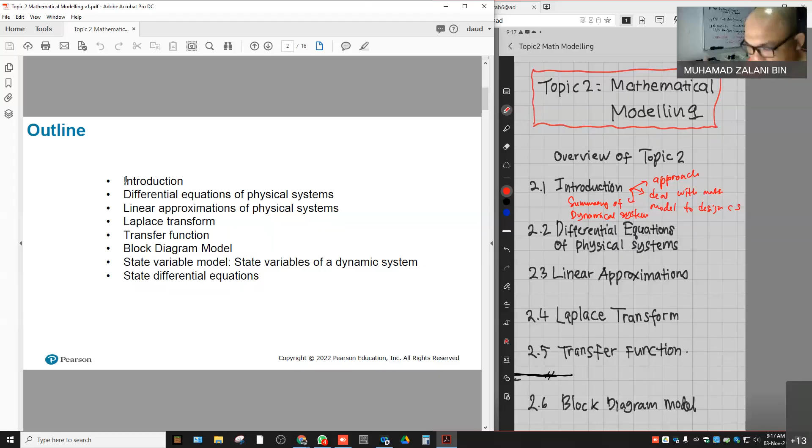Okay, after the 2.1 introduction, I will start with 2.2, which is differential equations of physical systems. So here we describe variables. You will be introduced to variables like the through variable and also the across variable.

What is the difference between through variable and across variable when we design the system using differential equations? In differential equations we deal with variables, derivatives, integration and so on, and for a particular variable we will see the difference between through variable and across variable. We will go into more detail about those.

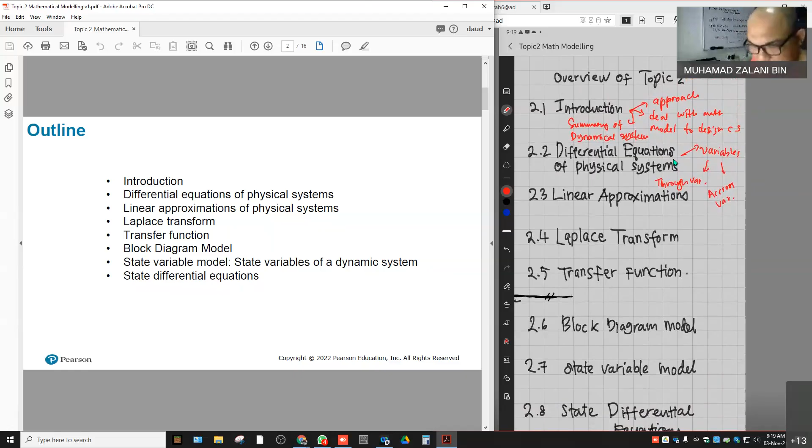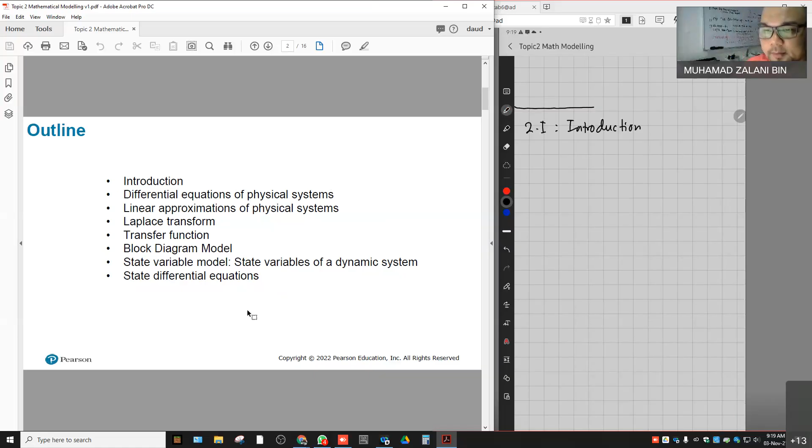Okay, so I hope that we can finish 2.1 and 2.2 in this 1 hour session. I don't know if I can cover it all, but I will try. Okay, so the beginning of topic 2, I'll start with 2.1, which is introduction. You see the slides, right?

Okay, so basically control system design and analysis is part of engineering design. If we have the group of engineering design like this, control system design and analysis is part of it. We can say that it is one of the branches of engineering design.

So what do control system engineers do? If you are an engineer dealing with control systems, what is your job scope? What do you actually do? Basically, what they do is design the control system, design a system by means of, yes, mathematical modeling.

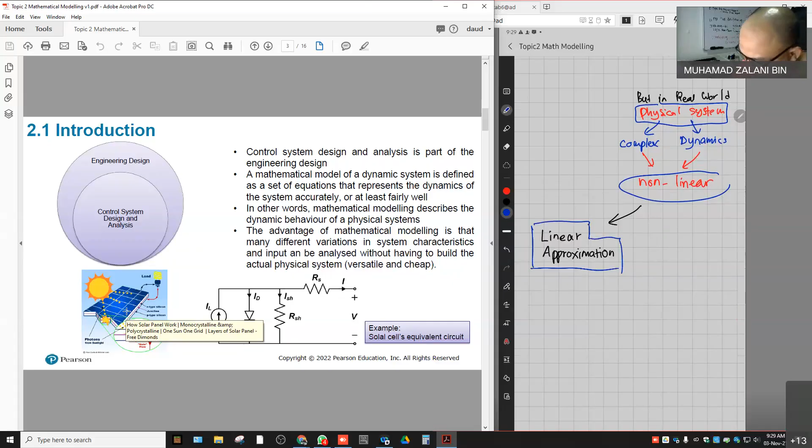Basically what we do is use mathematical modeling to transfer or convert the non-linearity of a system into something linear. This method is called linear approximation. You've already learned linear approximation. So in this case, we convert the non-linearity of a physical system, we transfer it, we do the linear approximation.

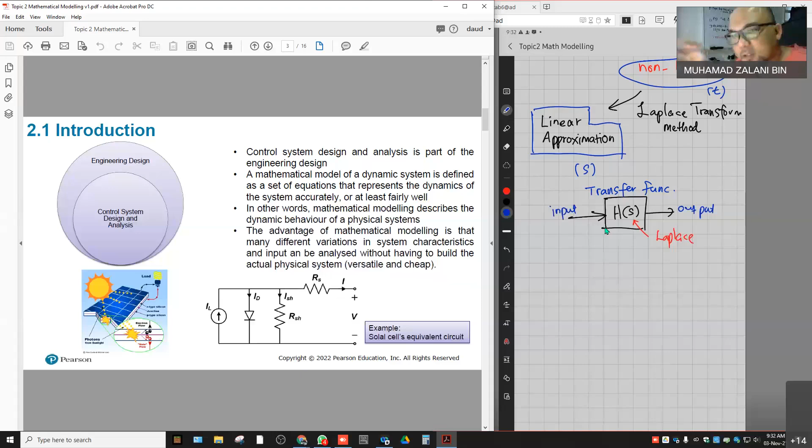So we represent that, sebab kalau tengok transfer function tu ada S kan, mean that this is Laplace. So we represent it in the form of transfer function that has the input signal and output signal. Dah nampak sikit dalam introduction, kita banyak menggunakan block diagram to represent the control system, something like this.

Ada block controller, ada summing point, ada plant, and then ada output. Ini plant HS katalah, ini controller GS, dia punya transfer function untuk controller GS, model je lah. Kita dah buat model dan dah transfer kepada dalam bentuk transfer function gunakan Laplace transform. So kita ada blok-blok macam ni, so kita dapat output.

Then kita juga menggunakan sensor. Sensor juga kita boleh model untuk design a closed loop control system. As you can see in this simple example of a block diagram that shows the control system block diagram, we have the first block here and then the second block that is represented by the transfer function.

So in this system, basically what we do is, as you can see for GS, it has input of GS and also input. Okay, let me just show it like this. For the GS block, we have input and output of GS block, which is the control block.

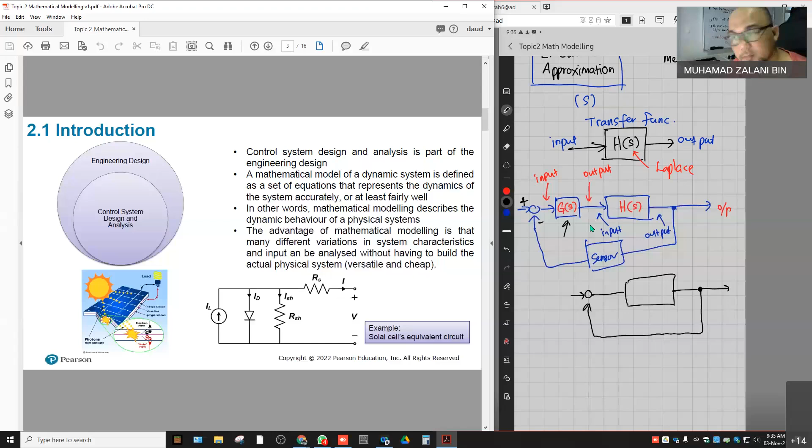Then in more advanced terms, we are going to find the solution for this control block diagram, we will try to simplify it into only one single block. So we will learn how to convert the multi-block control system block diagram into just one single block, which is like this. So adalah equation dia, equation dia akan jadi lebih panjang lah, transfer function itu untuk single block macam ni.

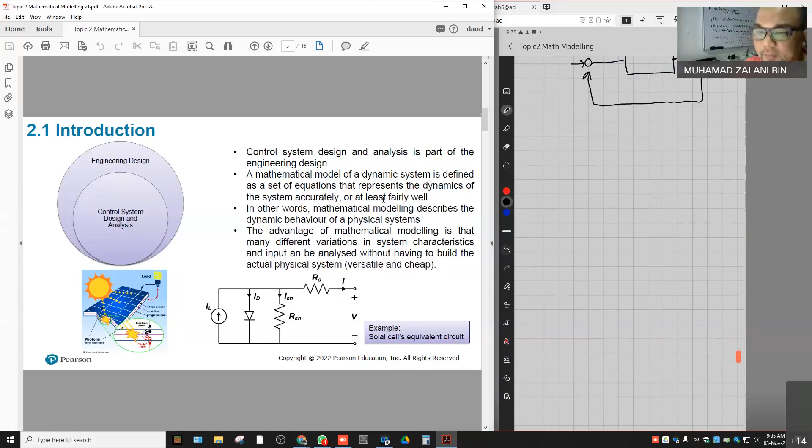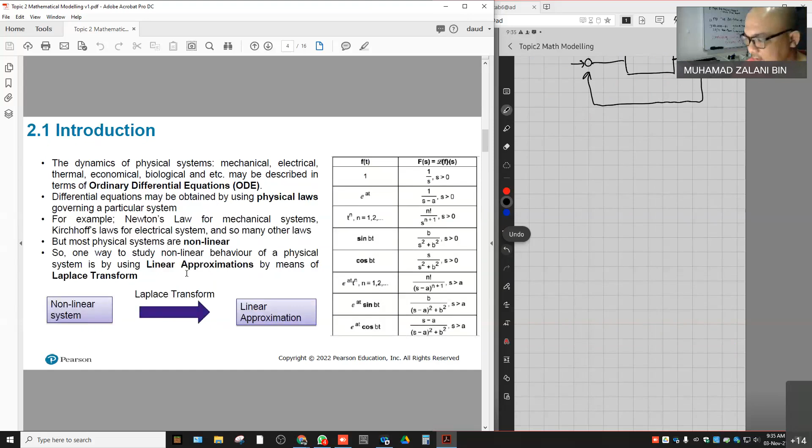So moving on to the second slide. Oh, dah hampir setengah jam dah. Slide pertama baru, okay. Actually untuk slide ni saya dah masuk dah sebenarnya, saya bagi pada yang ni. Okay, so nampak tak kat situ?

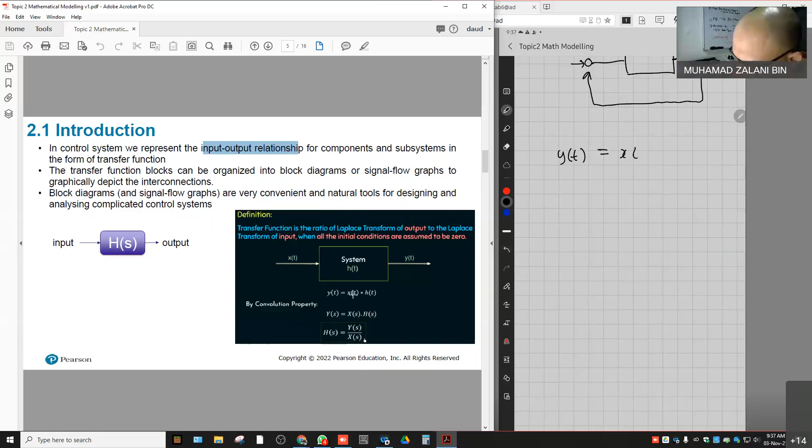Pernah belajar tak convolution? So convolution in time domain. So in system like signal and system, saya rasa dah belajar ni. In system, it is hard to deal with convolution in time domain. That is why we use the Laplace transform. Because when we convert this, when we convert YT equals to XT convolution of XT and HT like that, this is convolution. It is hard for us to solve the convolution in time domain.

Basically, what we do is to make it simpler by converting to Laplace transform in the form of Laplace transform, which is YS, HS. So bila dalam keadaan Laplace transform, dia akan jadi darab ataupun kali. So bila kita nak dapatkan HS, which is the transfer function of any of that particular block of the system, so HS simply YS divided by XS. Okay, so that is why we use the Laplace transform.

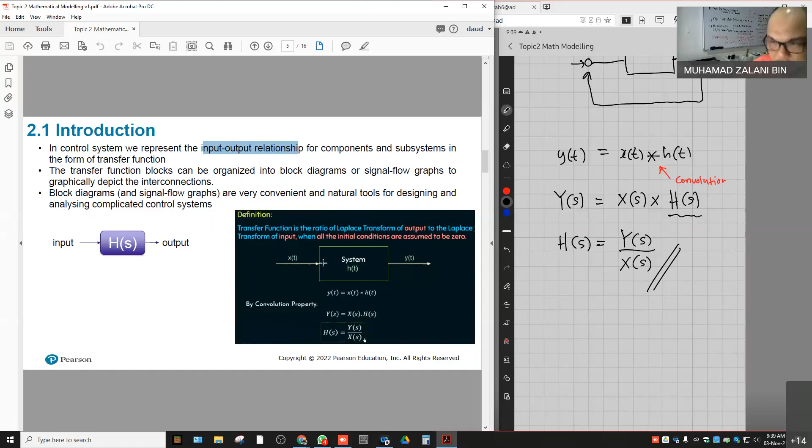So block diagram like this is a convenient tool for designing complicated control system. All right, so next is in the introduction. In designing a dynamic system, we will try to follow these rules, which is the approach of dynamic system modeling. So dynamical system modeling, basically we follow these rules, which is summary.

Saya tulis lah, summary of dynamical system modeling. When we do modeling of a dynamical system, non-linear system, we will try to follow these rules, which is the first one, define the system and its component. First thing first, we need to define the system and its component.

Number two, the rule is formulate the mathematical model with some assumptions.

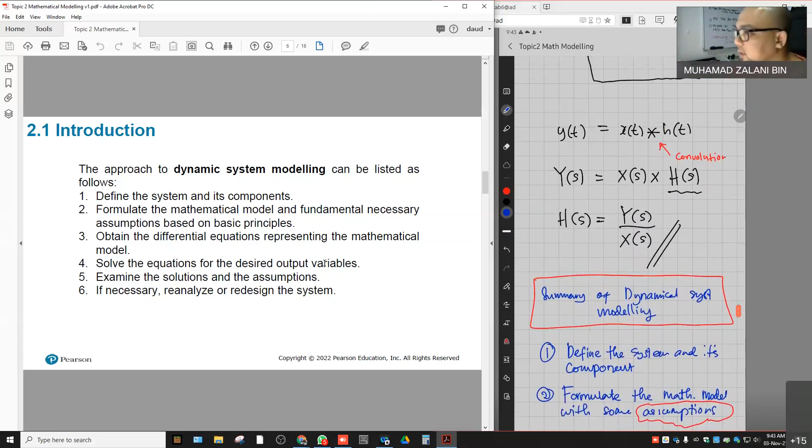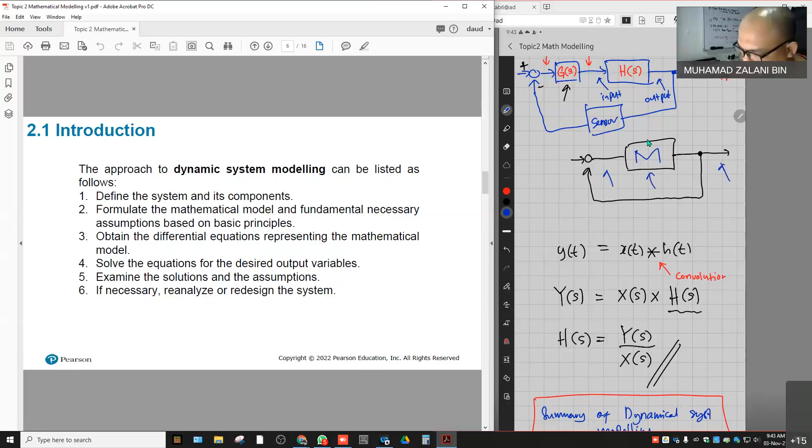There's input and output. When we solve the differential equation, let's say the system name is M. When we solve the differential equation of the M system, then we understand what is output. If we put some input, so what is output?

Right? And then finally, number 5. Rule number 5 is examine the solution and assumption.

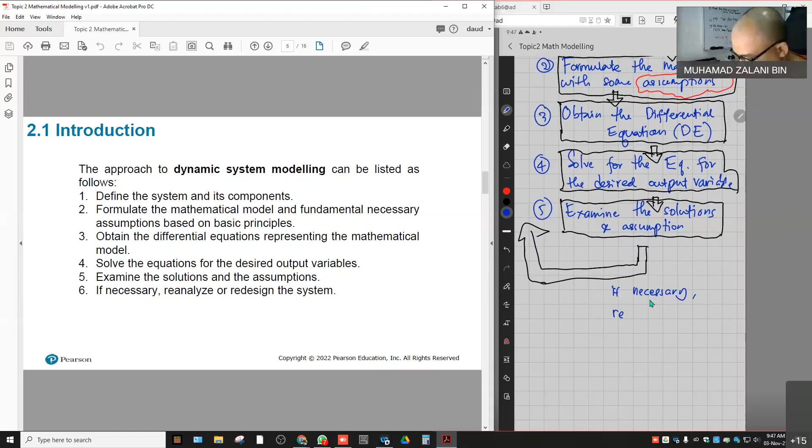So the last part is, if necessary, we should reanalyze or redesign the system.

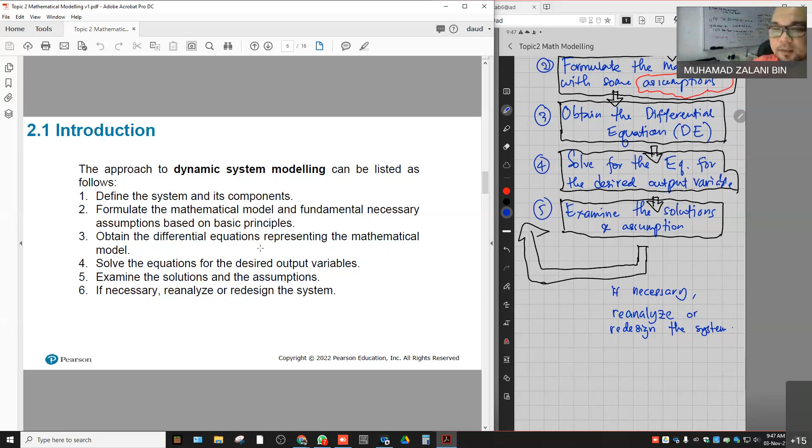Okay, so that's 3 slides for the introduction part. Alright, so next, I will continue to describe about this spring mass.

2.2, which is the differential equations of a physical system. Okay, next is differential equation of physical system. 2.2 is about - I'll write it in full since the title is differential equation of physical systems.

Okay, for this particular subtopic, we will be using some examples to understand what is through variable, what is across variable. We have through variable, across variable, two types of variable to deal with.

Okay. So differential equation describing dynamic behavior or performance of a physical system, right? And they are obtained by utilizing the physical laws of the process.

We use DE, okay, below this. So DE that describe dynamic behavior or performance of a physical system.

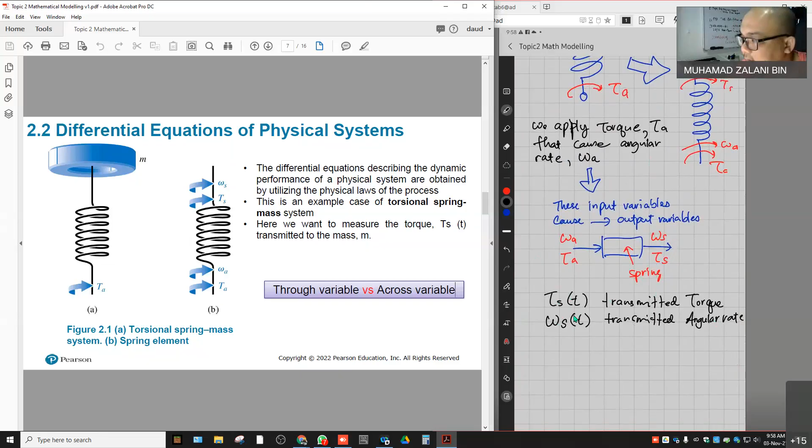So if we draw a block diagram, the plant is the spring. The input variables are omega A and tau A, and we want the relationship to tau S and omega S. So we have tau S, the transmitted torque, and omega S, the transmitted angular rate. From omega A and tau A we get transmitted angular rate and transmitted torque, represented by omega S and TS respectively.

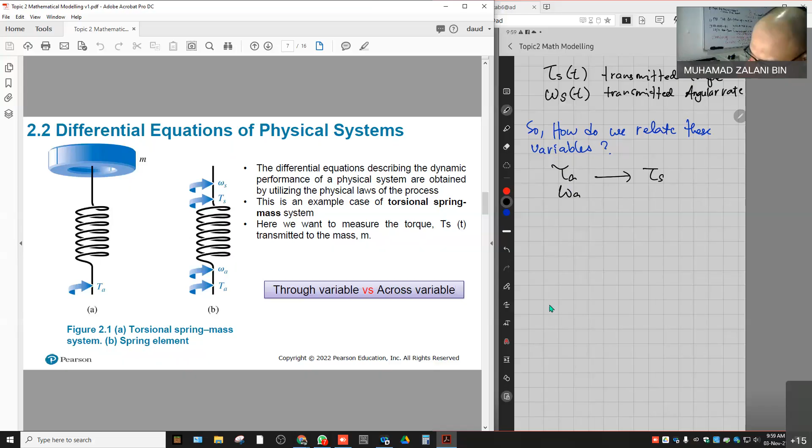Okay, so next, how do we relate these input and output variables, these four variables? We have tau A, at the output it becomes tau S. We have omega A, at the output it becomes omega S. How do we relate them?

So in this case, since the spring is massless, the sum of the torque acting on the spring must be zero. With the massless assumption, tau A transfers to tau S and omega A becomes omega S. The spring's weight has no effect, meaning the input equals the output.

So since the spring is massless, the sum of the torque acting on the spring must be zero. So in other words, tau A equals to tau S. Input equals to output.

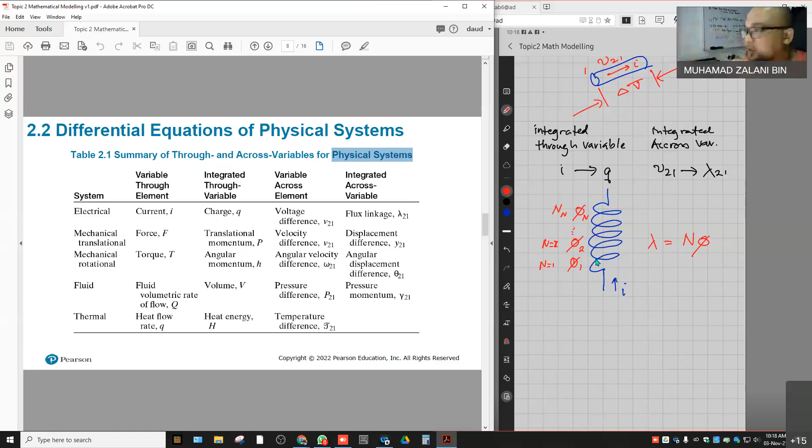So flux linkages is an across variable. Okay, and then another example. The first one is electrical system. The second example is mechanical translational. Remember, I just told you that translational means straight line. Let's say in this case, translational means linear, or straight line. Any object moving in a straight line, we can say that it is translational motion. So translational means straight line.

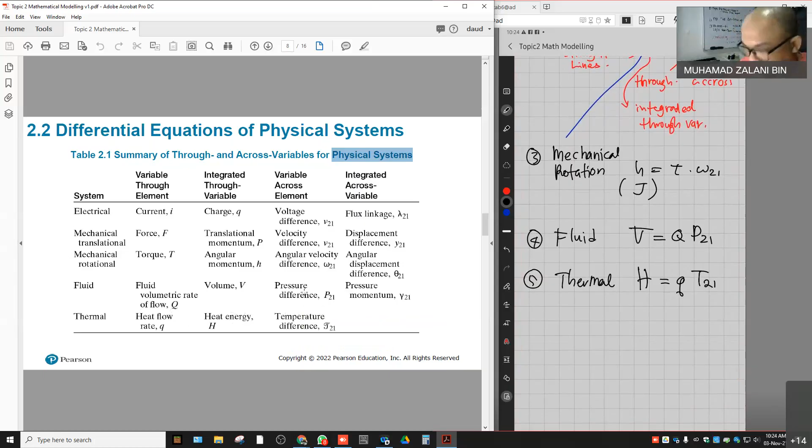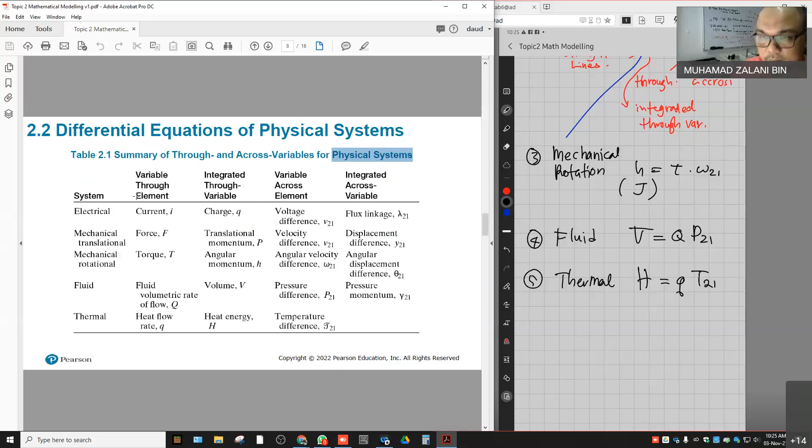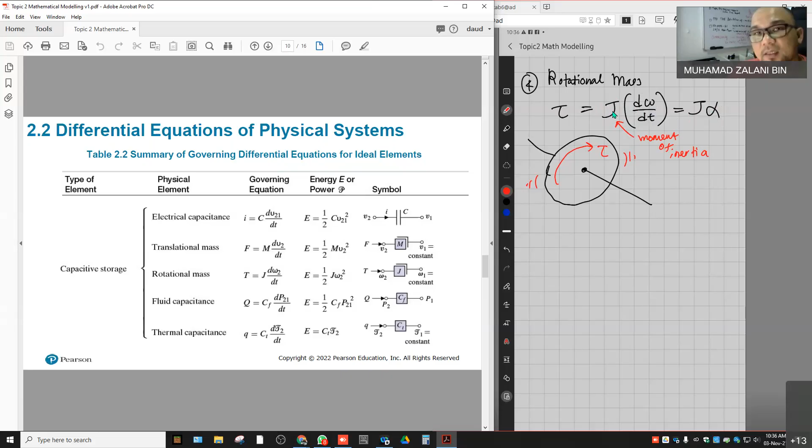The easiest way is to just memorize it. But you need to understand that torque is moment of inertia times angular acceleration. Angular acceleration is the rate of change of angular speed. If we take the derivative of angular speed, we get the angular acceleration. J is moment of inertia, which is analogous to mass. Alpha is analogous to acceleration. F equals ma, remember? So the equation for torque: torque equals J alpha.

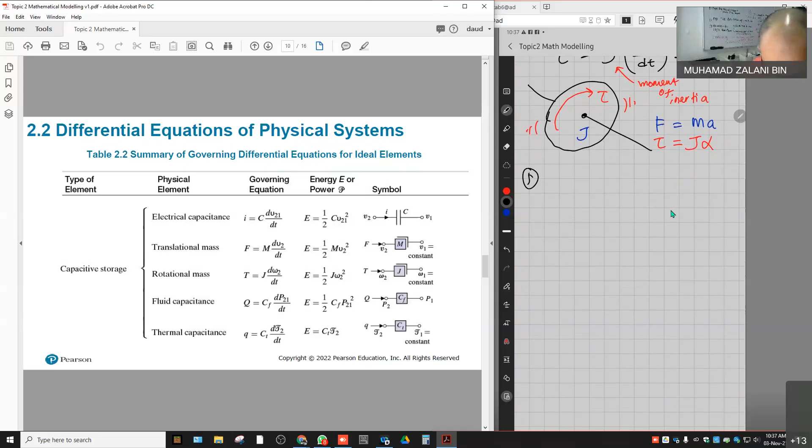Alright. We proceed to electrical resistance. This is for energy. I won't discuss all of them, there are too many here: electrical energy dissipators. Electrical resistance belongs to the energy dissipator type of element. Its differential equation: I equals 1 over R of V21. Let's say I have a resistor, V1 on one side, V2 the other. I have this R and I pass some current through this resistor. So current is the through variable.

For energy or power, in this case, power P is V squared over R, remember? V21 squared divided by R. That is power in electrical energy dissipators.

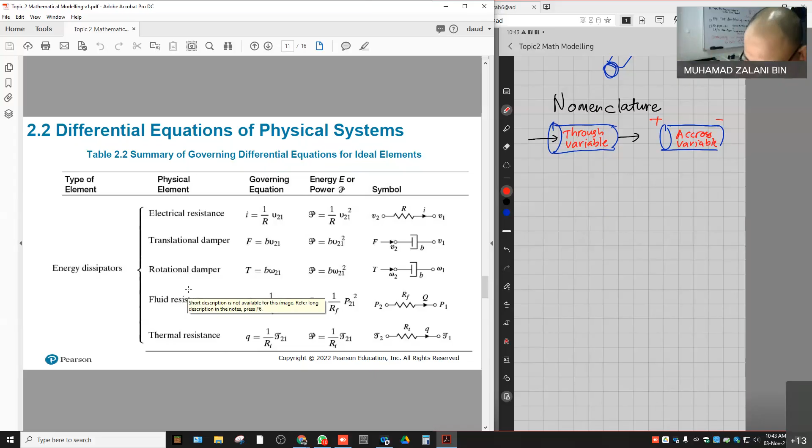So here it's listed so we become familiar: normally the first variable is force, represented by F. Another variable is torque, represented by tau; some say T, that's fine. Current is I, and Q. What is Q? Q is fluid volumetric flow rate.

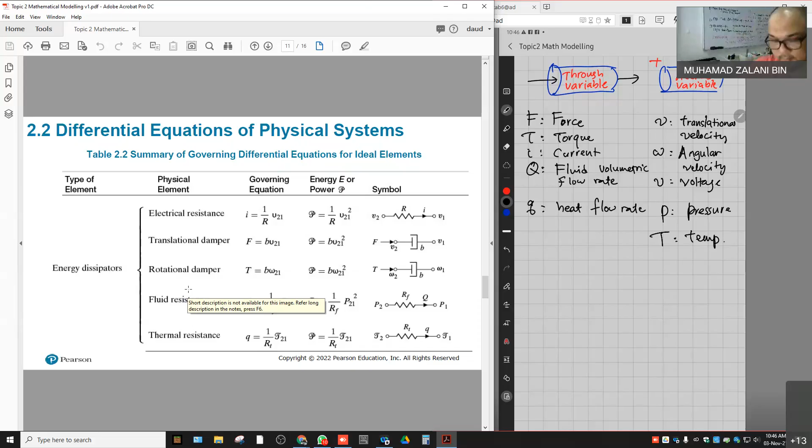Across variable, let's say V is translational velocity. We represent omega, W kecil, as an angular velocity juga. Translational means straight line, linear. And then we represent V juga as a voltage. And P, pressure, is also an across variable. Then T, we represent the temperature. So that is about nomenclature. You can refer also in the textbook for more details.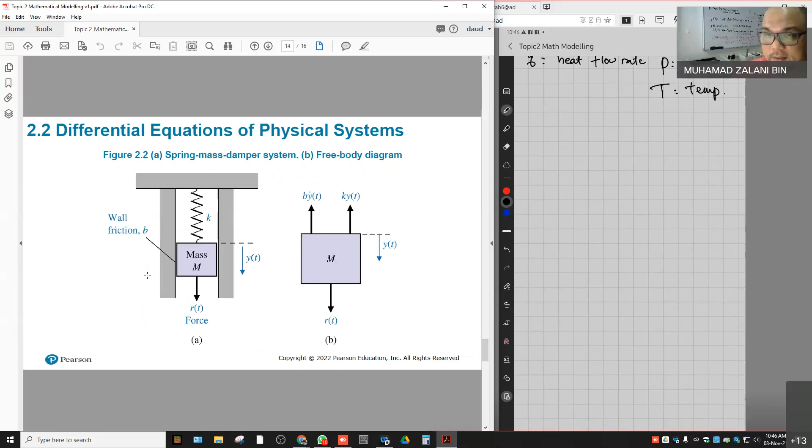So, yang ni apa ni? Nomenclature check. Mechanical system. Habis dah kan? Itu untuk nomenclature, through variable and across variable. Selepas kita discuss about table 2.1 tadi, kita discuss about table 2.2, which is more details about the equations used in, for example, inductive storage, capacitive storage, so and so forth. So in inductive storage, kita ada nomenclature juga.

So inductive storage, we represent L, biasanya untuk inductive element. Okay, 1 over K represents reciprocal translational, dalam spring lah ni, ataupun rotational stiffness. And inductive storage also we use nomenclature of I, which represents the fluid inertance.

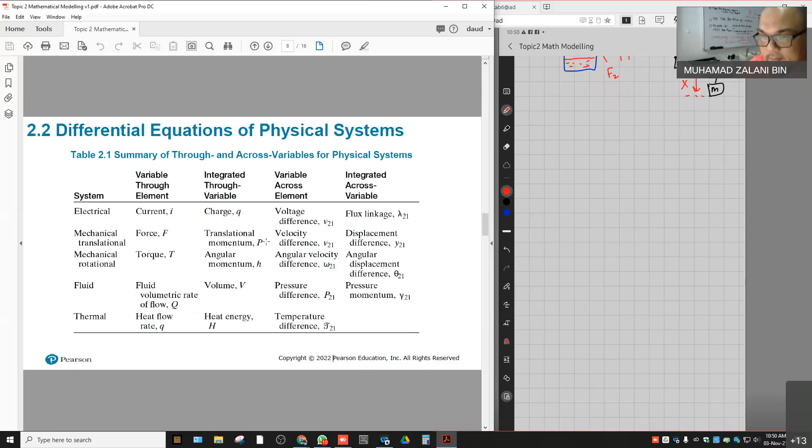Nomenclature for capacitive. Susah lah nak sebut capacitive storage lidah saya ni. Macam dalam video yang viral. Dia nak sebut Roblox, sebenarnya roadblock. Sampai ke sudah dia tak boleh sebut. Macam saya nak sebut capacitive. Setiap manusia lidahnya tak sama.

C for capacitive storage. Okay, M represents the mass. J represents the moment of inertia in rotational. And then CF represents the fluid capacitance. And then CT represents the thermal capacitance.